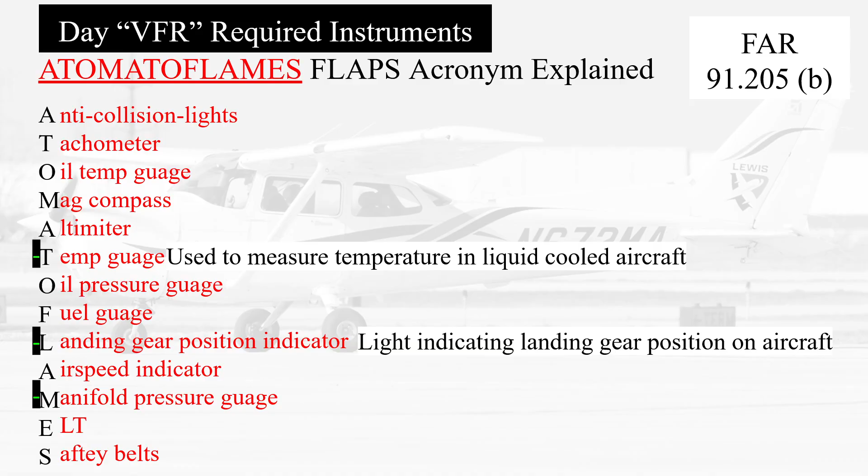Your manifold pressure gauge will measure the barometric, which is static, pressure that the engine is taking with a non-fixed pitch propeller aircraft. So we have our tachometer here, which gives us the engine runtime. This will also give us the revolutions per minute, the RPMs of the crankshaft. So if you have a fixed pitch propeller, it is directly connected to the crankshaft. If you want to measure the RPMs of the propeller, you look at the tachometer. It gives you the RPM of the crankshaft and propeller because it's one whole system.

If you have a non-fixed pitch propeller or variable or any other type, you need to know the RPM of the propeller and the crankshaft. So you need a manifold pressure gauge to give you the static pressure that is being used to determine the RPM of the propeller. So the tachometer will still give you the RPM of the crankshaft, but the manifold pressure gauge will give you the RPM of the propeller itself. They're very important, and it's important to know the difference between why a fixed is not required.

Moving on to the main topic. In general, the anti-collision lights are aviation red or aviation white. Remember, this is or, so it's not both. If you hear on a test, hey, do you need aviation red and? No, it's aviation red or aviation white. This trips people up. Tachometer measures the engine runtime, along with giving us the RPM. It measures the engine runtime, which is good for inspections, while the Hobbs time just gives us general aircraft time.

Oil temp gauge gives us our general oil temperature. Magnetic compass gives us magnetic heading. Useful once you begin instrument flying, but it does come with errors, and you'll learn all about this. Altimeter will measure height in MSL, mean sea level. Oil pressure gauge will give you your general oil pressure. Fuel gauge will give you your fuel. Airspeed indicator will measure your indicated airspeed.

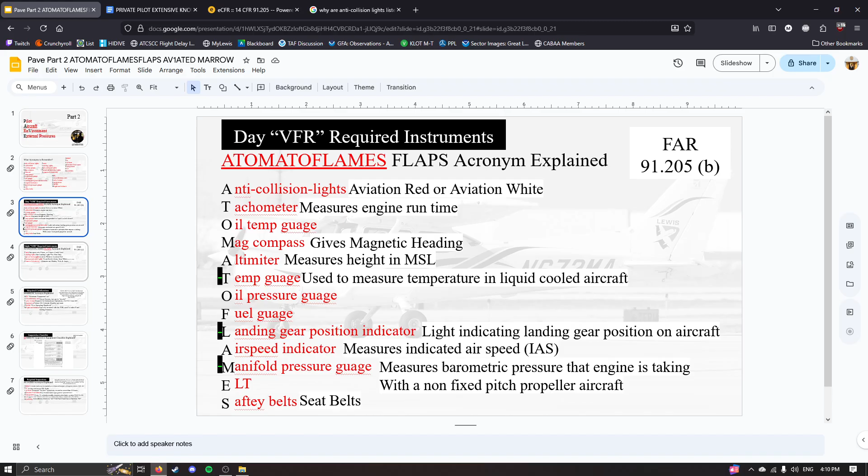Landing lights are required for hire only. Anti-collision lights, aviation red or aviation white, we discussed that, but you're like, well, why is it required twice? Well, because the FAA made a decision that any aircraft certified after 1996 is required to have anti-collision lights for VFR in the day, while for VFR in the night, it's required for any aircraft certified to fly after 1971. So they're ensuring that older aircraft are still to safe standards in the night.

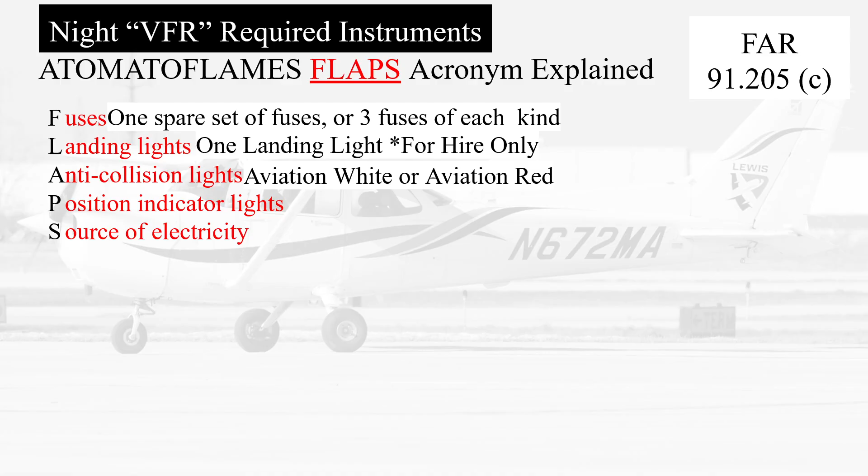Position indicator lights, these are the front red and green with the rear white. Sourced from FAR 25, but you don't really need to research that FAR. Just know that the lights are required and their position on the aircraft. It is all very similar to how boats work.

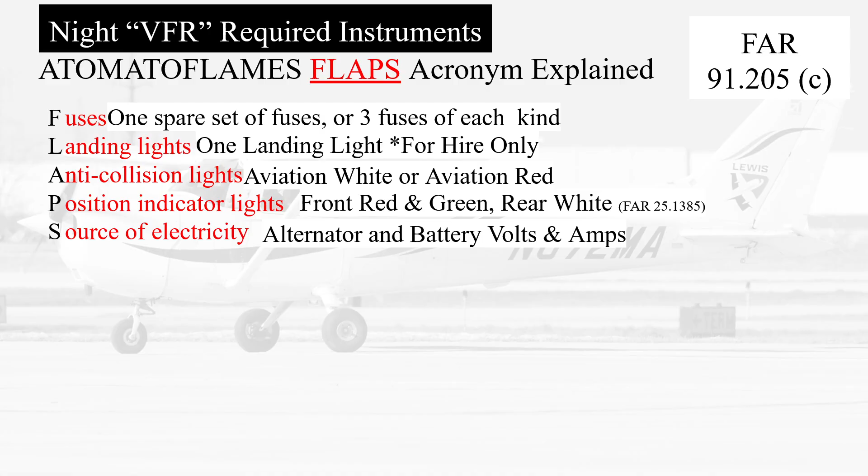Your source of electricity will be your alternator and battery. Remember, the alternator is directly connected to the crankshaft system, so as the crankshaft runs, it charges the alternator, gives power to the battery, and charges it as well. Know that generally the alternator is a higher volt and amperage than the battery, so that it is able to actually charge the battery. Some aircraft have standby batteries, some do not. It is not required to have a standby battery. A battery in general, though, is required.

A MEL is a minimum equipment list, and in the next slide, we will go through what is included with these lists for inoperative and down equipment. Just know that the general minimum equipment list is an overarching list of the bare bones required stuff to fly, like wings, propeller, the basic stuff. It's expensive to get for an aircraft, and it is actually not required. Mostly for extremely large aircraft, it is required. But just know for your general Cessna or Piper, you're not generally going to have a minimum equipment list.

Airworthiness certification, remember that these never expire, but they can become invalid if you do not complete your inspections, registration, or do not have any of the documents required for the aircraft. Radio license is required for international operations only. If you do want to get the radio license, you need the FCC Form 605. You also have to get these for yourself.

Registrations, so for federal, it is 84 calendar months, which is 7 years. And remember that these end at the end of the month. It's a calendar month, and the state is required dependent on your state. Your POH is the Pilot Operating Handbook, generally updates the operating standards for your aircraft. Any weight and balance is typically included, but sometimes you might have to have a separate document for the weight and balance, which is required for each flight.

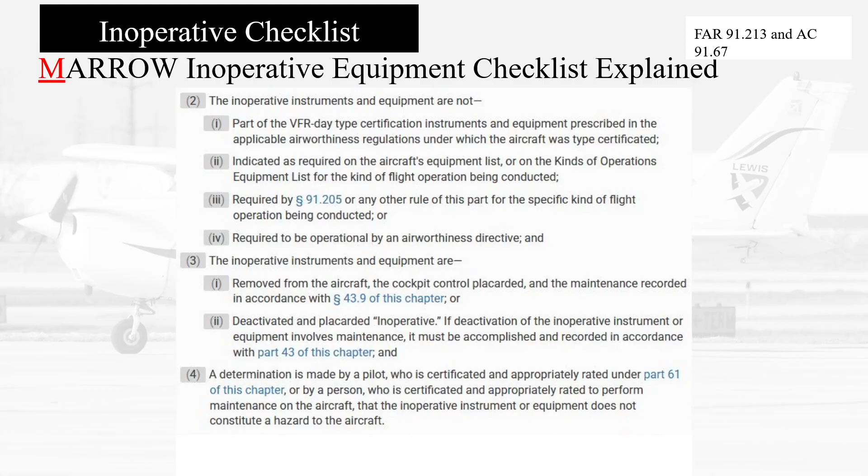You can also use AC 91-67, which is an easier list to understand for student pilots. This will just give you kind of how it works, and these are valid FAA documents. So is it required under the kinds of equipment list for the first section? If yes, remember, if you find any of these is required on any of these equipment, it's unairworthy. If not, you continue. But at the end of these decisions, if it's not in any of these documents, it's your decision if you're flying.

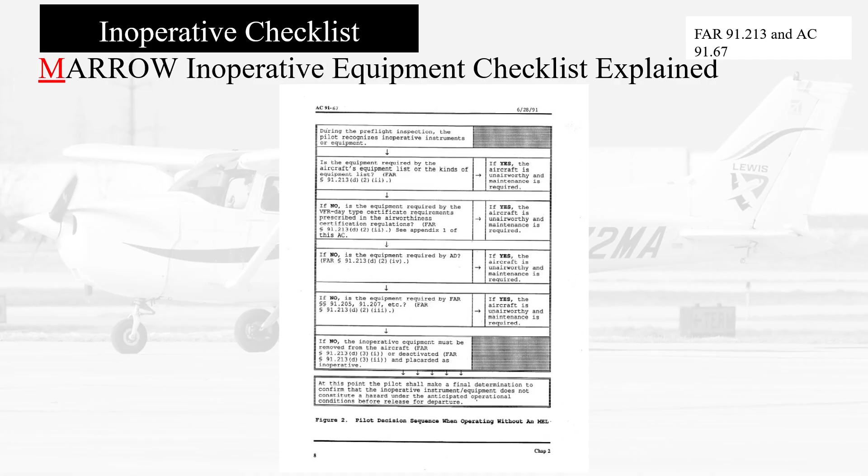Next, we're going to move into the required inspections. This is the AV1ATED acronym. There's a bunch of FARs on the top right again. Remember, for these, we are mainly just looking at FAR 91.409, which is general inspections, and FAR 91.207, which covers our emergency locator transmitters. These are pretty simple, and we'll go through each one.

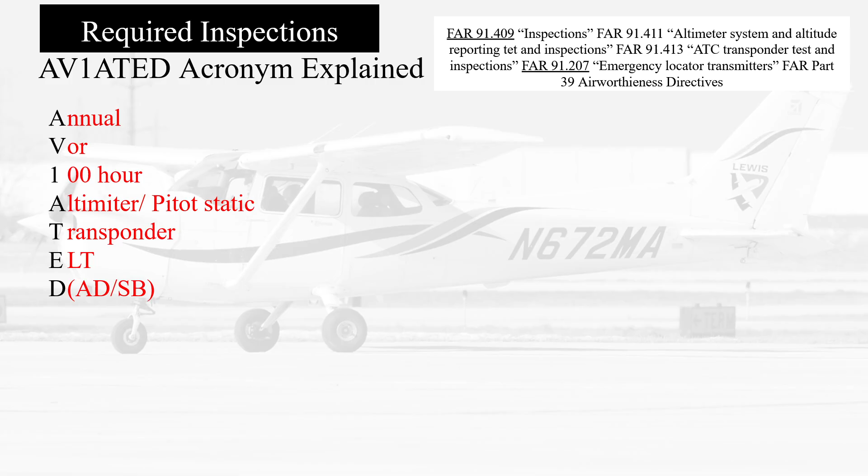So remember, everything in aviation is by calendar months. So 12 calendar months will be the end of the month. Say I got my annual on April 13th, which is my birthday. The next annual will be due on April 30th of next year. These annuals must be done by an airframe and powerplant mechanic with inspection authorization. These are pretty much a very high level of mechanics who can certify any of these inspections. Now, if you are a general A&P, you cannot do an annual, and you cannot do another inspection and cover it as an annual. If you're an A&P plus IA, you can cover it as an annual.

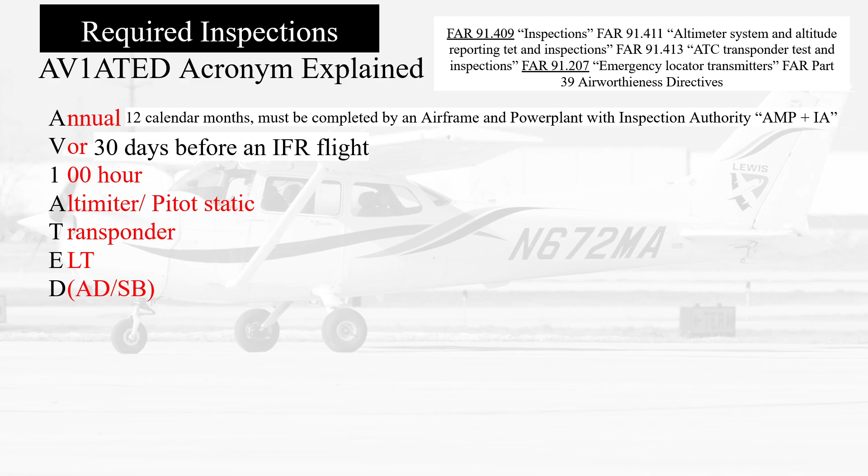VOR checks are required 30 days before an IFR flight. VORs are useful for determining radials and navigation, instrument flying. It's kind of how you navigate with ground-based systems. You'll learn all about that. Don't worry.

100 hours. These are done every 100 hours and are required for hire operations. You can exceed this by no more than 10 hours. So if you fly for 100 hours as a for-hire operator, and you don't get inspected within that 100-hour period... The 100-hour is generally like an annual, but isn't. It's pretty much the same as the annual in how deep the inspection goes. If you don't get it within that period, you can exceed the flight by 10 hours, but the only purpose of the flight past that 100-hour period can be to go get that inspection done.

Now, for any of these inspections, you can get a ferry flight, which is like a temporary flight to go get the inspection done. So if you do not have an A&P plus IA at your airport, you can go to another airport with a permit. But just know that you cannot exceed that 100 hours by 10 more hours unless the sole purpose of that flight is going to get that 100-hour. So you can't fly for 100 hours as a for-hire operator and then go joyride around for 5. You have to get that flight done for the sole purpose of that 100-hour.

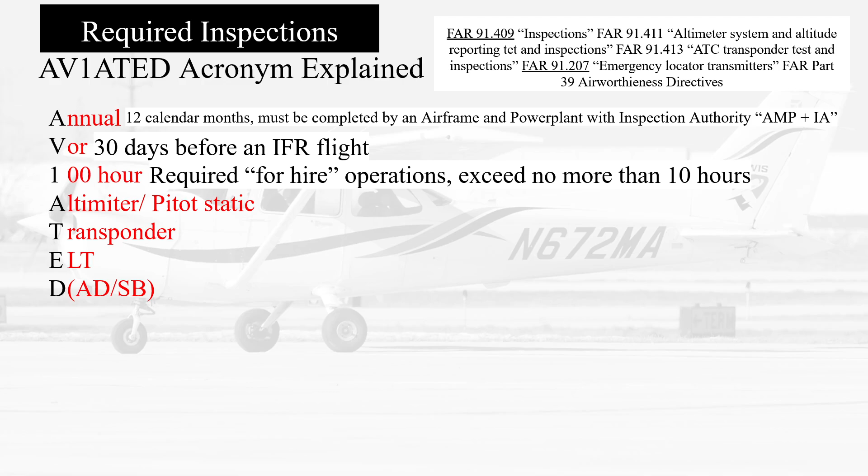The altimeter pitot-static system is every 24 calendar months along with the transponder, and it covers all of the pitot-static system in 91.411. The transponder is tested every 24 calendar months and does not inspect the pitot-static system, but it inspects the transponder system. That's a funny typo.

Your ELT is your emergency locator transmitter, and it'll be tested every 12 calendar months. So the general ELT is every 12 calendar months. The batteries are every 1 hour of cumulative use, or 50% of their useful life. So remember, the emergency frequency is 121.5. So 12 is the 12 calendar months, 1 is the 1 hour of cumulative use, and 0.5 is the half, or 50% of life.

Airworthiness directives and service bulletins. These airworthiness directives are FAA required, and service bulletins are manufacturer suggested. Service bulletins are basically recommendations on what to do with your aircraft, such as add-ons and specifications. There's one for each type of aircraft, and you can look them up on a website.

While the airworthiness directives are required to follow and are published by the FAA for your certain aircraft. For instance, if an aircraft is manufactured and they find an error, you're required to follow an airworthiness directive to counteract that. Usually after an accident, they'll publish an AD saying, this is what you have to do from now on with your aircraft, or else it is unairworthy. Remember, if you do not do any of these inspections, your aircraft is unairworthy, although the airworthiness certificate never expires.

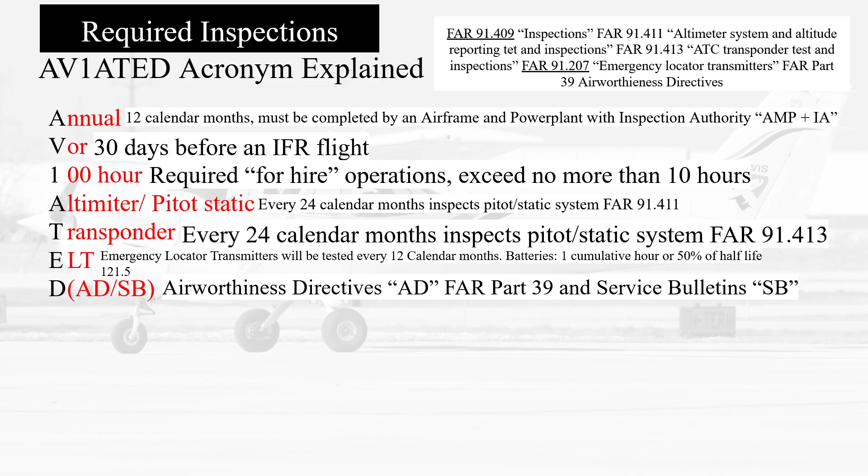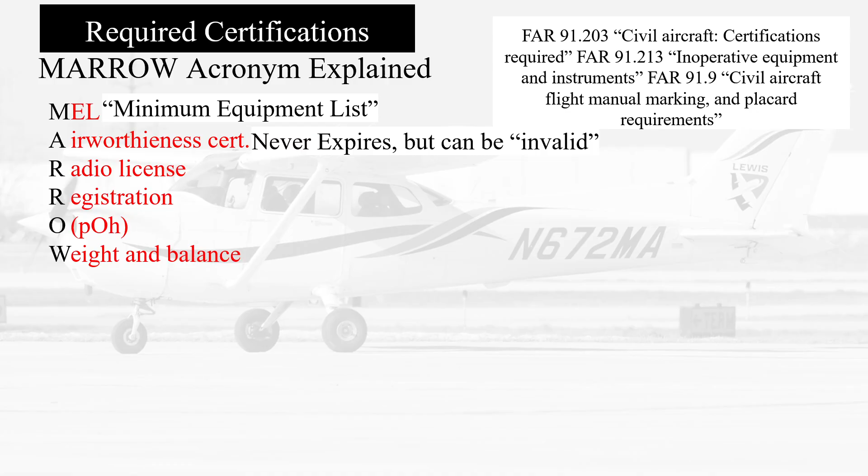So this is the end of this, and for each of these, you can obviously pause the video and go through them all, but these are all very important acronyms to remember in general aviation flying as a private student, commercial, and so on.